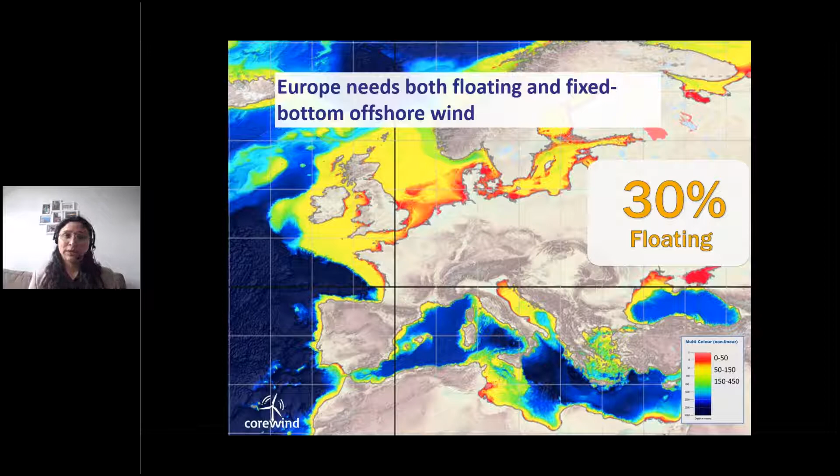Now, in the next slide I show you how we have a pipeline worth of projects of at least 7 gigawatts that we are sure the industry can deliver at a cost of 40 to 60 euro per megawatt hour. But this is only going to happen if we have the right policy framework that will remove the barriers to mass deployment. And also to mention, this 7 gigawatt pipeline is mostly led by 3 countries, Norway, France, and the UK, but there are others, of course, from Southern Europe also chipping in.

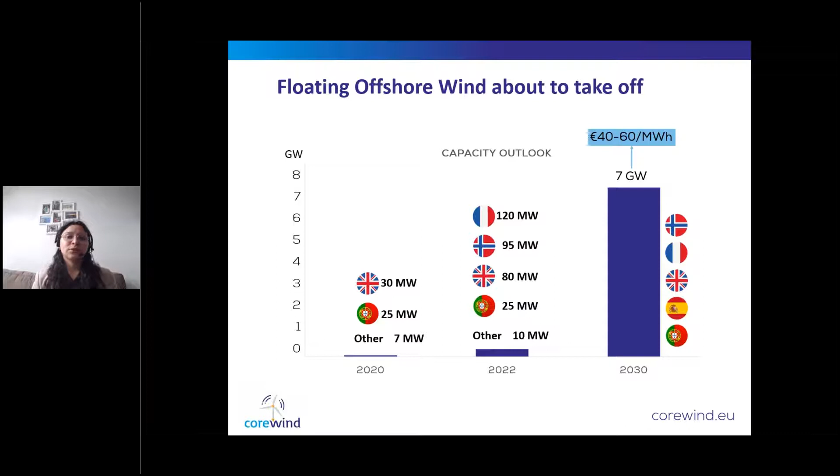Now, what is it that we need then to move forward in terms of the regulatory barriers? Well, I will show you in the next slide what is the right framework for delivering floating offshore wind farms. We want to have enough visibility for the supply chain to be ready to deliver these large projects. This requires a clear auction timetable, which means we want technology-specific auctions because the technology still needs one more step towards cost reduction.

This is also possible to achieve with a model using contracts for difference. This is currently the best model to provide stable revenues. Actually, banks today are willing to lend up to 80% of all the upfront costs when using CFDs. Also, we want a one-stop shop for permitting. This is going to make all of our permitting process much faster and with a single authority, and much more transparent.

We need to ensure there is enough development for the grids. This requires both private and public investors. And of course, we're going through all this while ensuring a happy coexistence with other sea users, so not only dedicated to offshore wind. So, to conclude, I want to show you in the next slide how we are delivering this.

So we are delivering floating wind farms in the future, which requires us to link currently our innovations, which is the research and innovation sector, with the applications, which is the supply chain and industry applications. And the way to do so is through the right policies. So together, this is how we can deliver and scale up floating wind to deliver renewable and affordable electricity to all Europeans. Thank you very much.

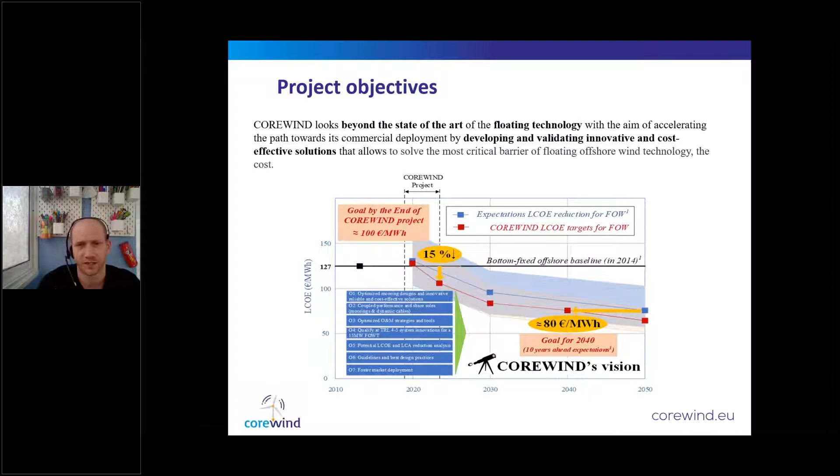If we move on, one of the key objectives is how we are approaching this. What are the key challenges on floating, as also related to Lisa's previous presentation? We have key challenges on cost, reliability, industrialization, and so on. To address this, we are trying to cope with different technologies and innovation procedures.

We will work on digitalization, which is really important to increase or maintain reliability and operational maintenance. We will work on high multi-fidelity advanced models, because we really need those advanced models to cope with the whole design and construction phase. And we are working on optimization of mooring, dynamic cables, and so on.

Something that is sometimes not that considered within EU research projects is the importance of industrialization and standardization. This is something we are strongly considering within Corewind, because what we want is to really make it happen that our innovations will reach the market at some point and will help. Of course, industrialization will come later on, probably in a few years.

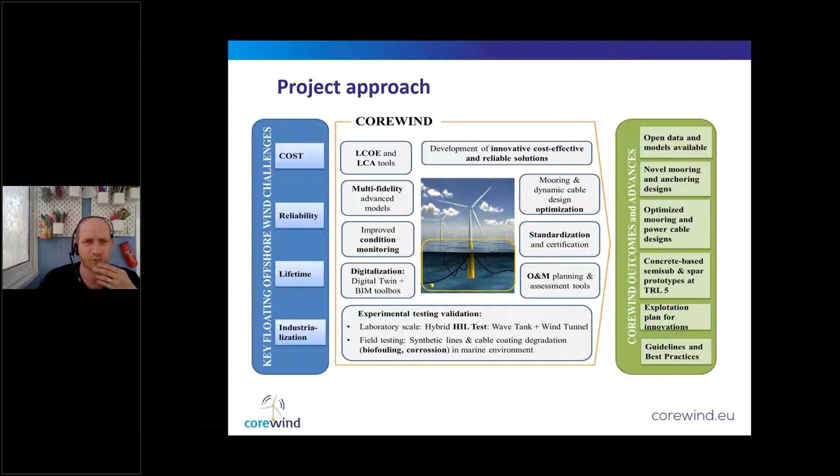But what we will provide, at least by the end of the project, will be some open data, open models, new designs, and of course some knowledge and guidelines, to ensure that forthcoming innovations become true. Then, let's detail a bit what the expected impacts are.

Of course the key objective within floating wind is just to reduce cost. We want to go beyond a reduction of the LCOE of 15%. Of course, this can be done with different approaches and different innovations, and what we will do is take advantage of most of them and put them together.

So we will go from upscaling - of course we are already working with 15 megawatt wind turbines - we will work on shared moorings, optimized and integrated designs for dynamic cables, and improved operational maintenance strategies, including digital twins and so on. And finally, also include wind farm lifetime.

We want to extend it up to at least 30 years through the appropriate digitalization techniques. And in that part, we will provide some nice tools and key reference documents to help the value chain.

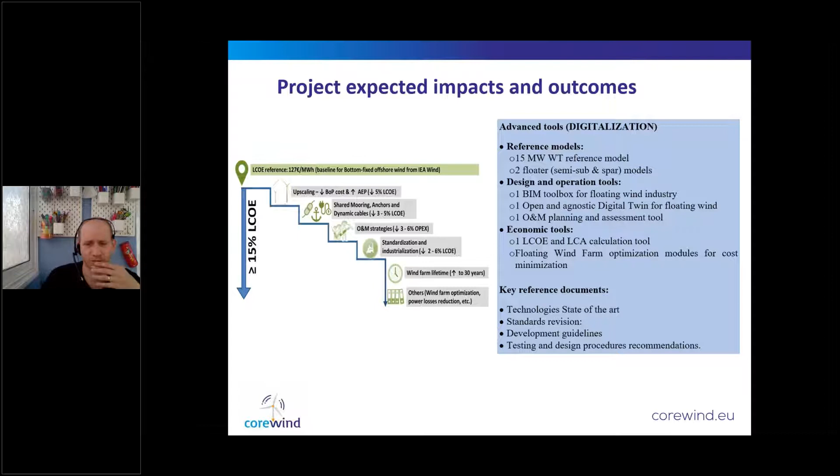If we move to the next slide, we will see where we are now, and somehow it will introduce the coming presentations that we will see. As Sabina said, the Corewind project is now at month 18, so of course we are expecting to provide much more outcomes and more detailed results.

But up to now, what we can offer and already present are our reference models. You probably all know the 15 megawatt reference from NREL, and we also have two floater models already available, so you can try to use them if you want. We also have some economic tools that will be available soon, like an LCOE calculation tool. And finally, we already have some public reports and deliverables.

More details on these resources and outcomes are on the next slide. You can see here that you can go to our web page, as Sabina already told you - on corewind.eu publications, you will find all of these reports.

So we have quite a bunch of them, and I think they are quite interesting and useful. And if you visit our Zenodo community, you will find out there not only the reports that are available in both sites, but also the models. So you can download it for OpenFAST and use the WindCrete and the ActiveFloat models for the analysis.

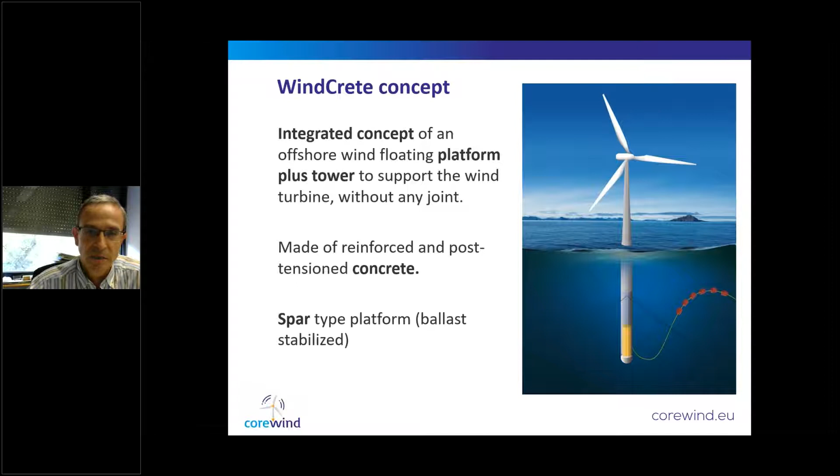In the next slide, we can see one of the characteristics of looking for low cost or cheaper and reducing the LCOE and so on. We can take advantage of using some materials, like for the ballast. In this concept, we propose the use of black slag from electrical furnace. This is a byproduct, and it is possible to achieve easily a bulk specific weight of 25 kilonewtons per cubic meter, which is not as much as we can obtain with other materials, like magnetite. However, it has the advantage that it is significantly cheaper, as the estimated cost already placed would be around 35 euros per ton.

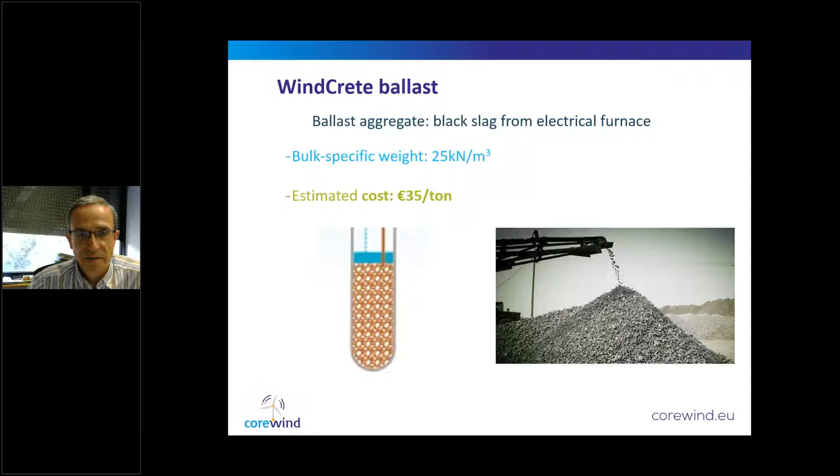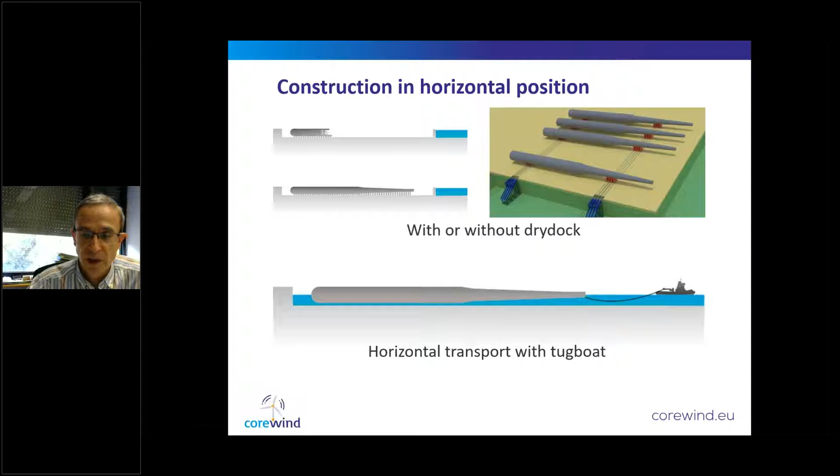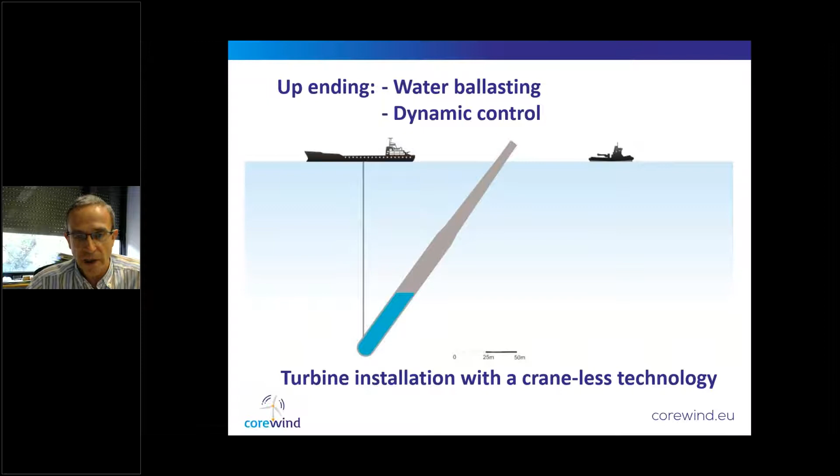Following that, for the installation, in the next slide, we can also see the upending operation. That is also one of the challenging operations during doing this in the open sea. Of course, we use water ballasting and a dynamic control, because this process has to be very smooth, and in fact there is a huge amount of tonnes moving, so this has to be carefully done, but in a smooth way with dynamic control. And finally, for the installation of the turbine, we are working with a craneless technology.

To summarize the concept, before going ahead with more details of the model that you can find in Zenodo, let me summarize some of the particular advantages or properties of the WindCrete concept. First, that this is monolithic without any joint, and this is interesting in any case because it produces more durable constructions and platforms. The draft, of course, in a spar buoy is large, so normally we estimate that the minimum draft we can work with is around 80 meters, and the maximum draft that we thought would be reasonable from the economical point of view is around 160 meters. That is, for example, for the 15 megawatt wind turbine. This can be a limit.

The operational depths, consistently with the previous draft, go from 100 meters to 1,000 meters, despite, of course, the mooring system being significantly more expensive. And what is very important is that the design is adaptive, and as you will see, we can also produce a design for a 15 megawatt wind turbine.

At the end, the advantage of using a structure which is more durable and with concrete is that we can assure, for example, a lifespan larger than 50 years. And this is also very important because it reduces everything. And also the use of concrete with larger structures produces a reduction of the CAPEX. And if you have a more durable one with almost no maintenance in the platform itself, this also reduces the OPEX. And at the end, all this produces a significant reduction of the LCOE.

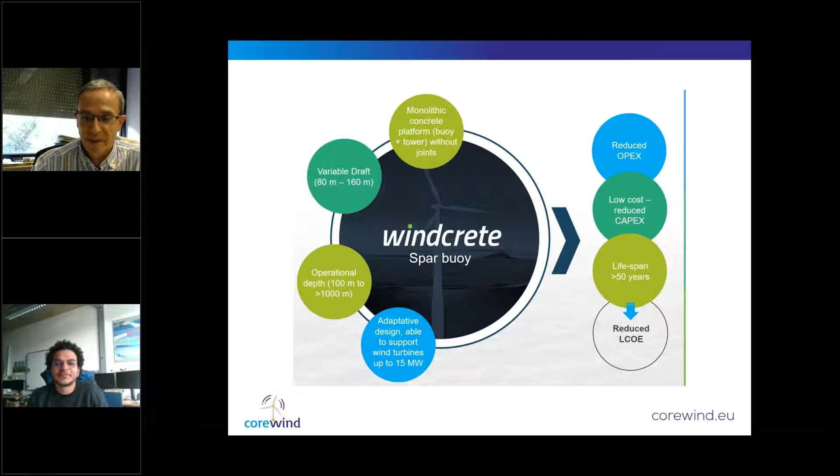Now, my colleague, Yusuf Mahfoud, will present the details for the Gran Canaria prototype. We can't hear you, Yusuf. I think you need to unmute yourself.

Sorry. Thanks, Clement. In the next few slides we will go through the WindCrete design for the Gran Canaria site, which has a depth of 200 meters. The draft of the WindCrete spar buoy in this site will be 155 meters, with a hub height of 135 meters. As you can see in the figure, the tower base diameter is 13.2 meters and the tower top is 6.5 meters. And the buoy structure is made out of mainly 3 parts.

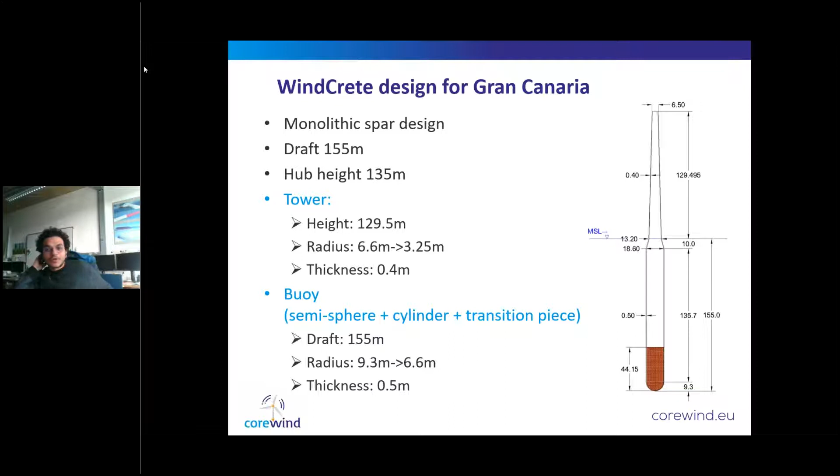At the top, 10 meters of a transition piece, which is a conical shape, and then we have a cylinder to give the buoyancy forces to carry the RNA, the rotor nacelle assembly, and the tower. And at the bottom, we have a semi-sphere shape to decrease the pressure at the bottom of the spar floater. In the next slide, we can see the composition of the FAST model.

So we use the 15 megawatt IEA wind RNA without any changes: the blades, the nacelle, and the generator. And we couple it with the WindCrete floater, which includes the tower, as Clement mentioned. And we have a mooring system, which is a catenary symmetric delta-shaped mooring line system to provide stiffness in the yaw direction as well as the sway and surge directions.

For the controller, we tuned the ROSCO controller, which is the NREL reference open source controller, for floating wind turbines to prevent any negative damping in the pitch direction. In the next slide, we see natural frequency results from a free decay test done for the OpenFAST model. On the left image is the surge decay, and on the right the pitch decay, with the frequencies in hertz and seconds in the table below for surge, heave, pitch, and yaw.

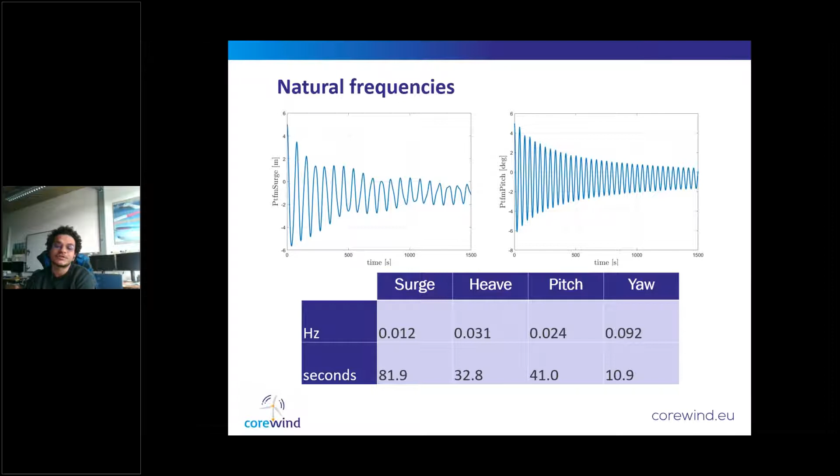For the platform, the surge natural period is around 82 seconds, the heave period is around 33 seconds, while the pitch is around 40 seconds, and the yaw period is 11 seconds.

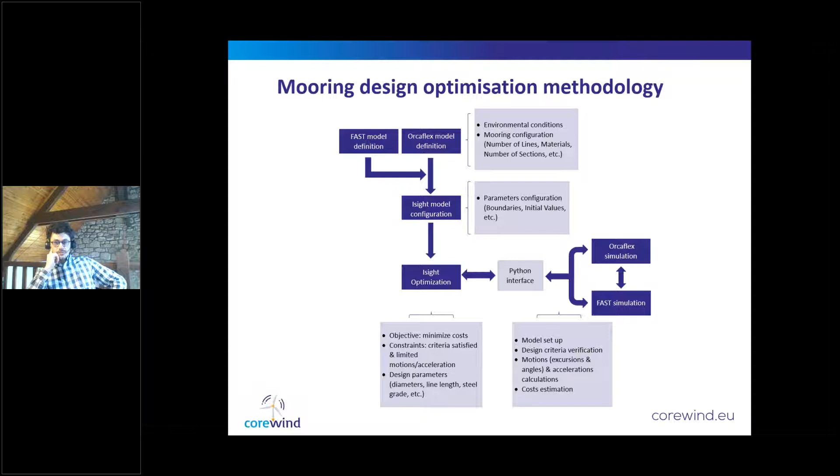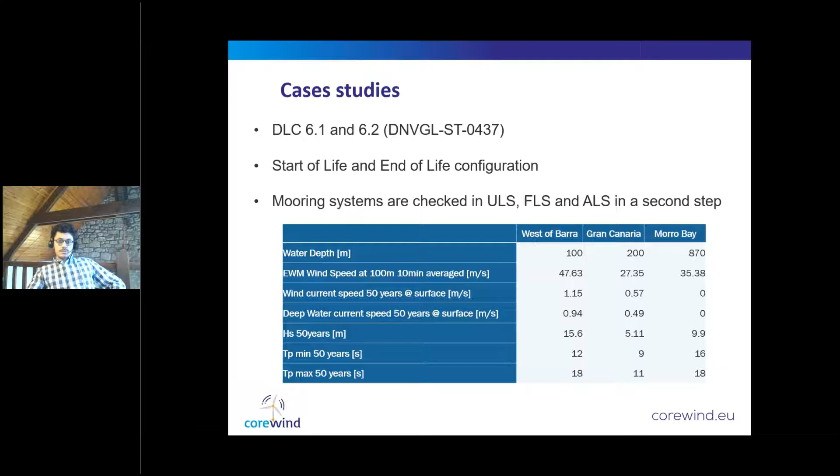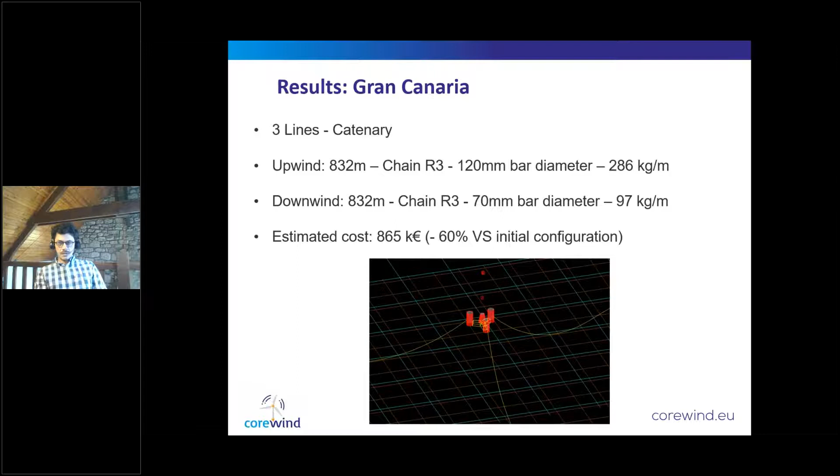On the next slide, we are presenting the results for West of Barra. As I said before, this site is a lot more complicated, so the mooring system is a lot more complicated. This mooring system is also a catenary mooring system, composed of 12 lines. You have 6 catenary lines upwind and 3 lines on each side downwind. And the lines are composed of nylon, chain, and clump weights.

The nylon is here to add some elasticity in the axial stiffness of the line to damp the peak loads a bit. And then we are using some chain and clump weights to create some weight in the mooring system, to create what we call the mooring restoring force.

So what you can see is that the lines are really long. We have more than 1 kilometer of line length, and our estimated cost is really high also, almost 15,000 kilo euros for this mooring system. And we have no comparison with the initial one because the initial mooring system wasn't working.

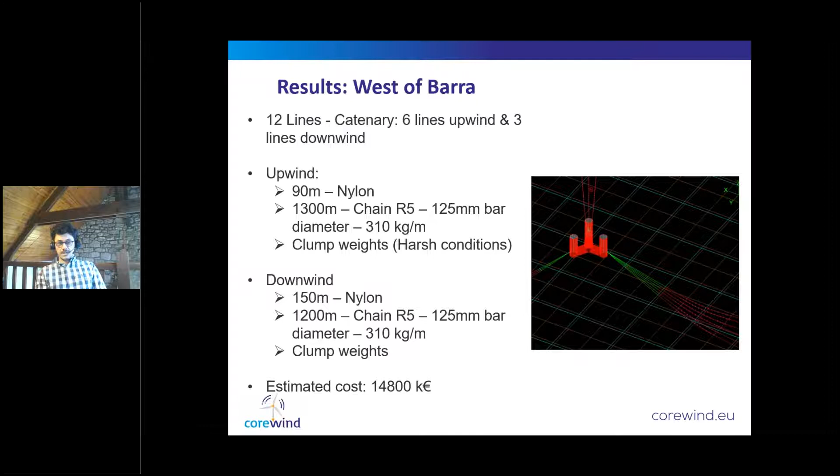On the next slide, we are presenting the mooring system for the Morro Bay site, which is a deep water site. So it's a semi-taut mooring system with polyester line, which offers a really high axial stiffness, with 50 meters of chain on top, and on the bottom between 130 and 140 meters of chain.

This mooring system was also optimized, and we can see that we managed to reduce the price by 55% compared to the initial mooring system.

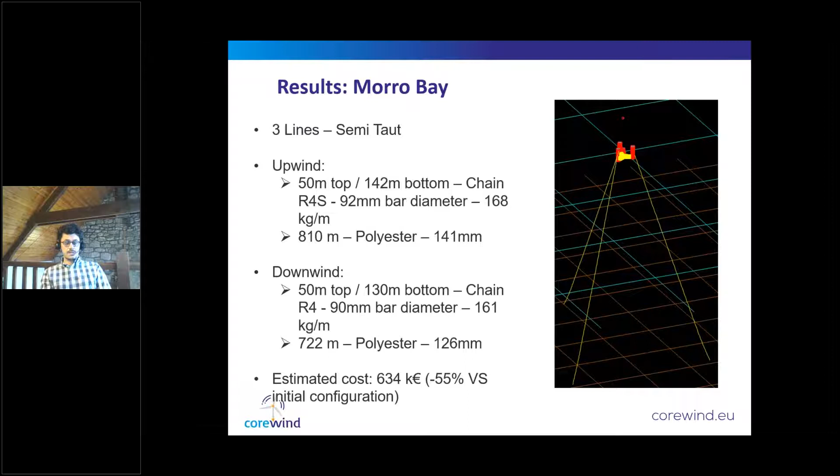On the next slide, we are summarizing the comparison between the price of the mooring system. So as I was saying, in Gran Canaria, we started with a price between 2,000 and 3,000 kilo euros, depending on the chain grade. And we managed to optimize the mooring system to reduce the cost down to 900 kilo euros. For West of Barra, we don't have any comparison because the initial mooring system was not fulfilling the design criteria.

And for Morro Bay, the last mooring system, we reduced the price from 1,400 down to 600 kilo euros. So this was the mooring system that we optimized for the first year, which are quite basic mooring systems. And now we are starting some new tasks to look at some more complex and optimized mooring systems.

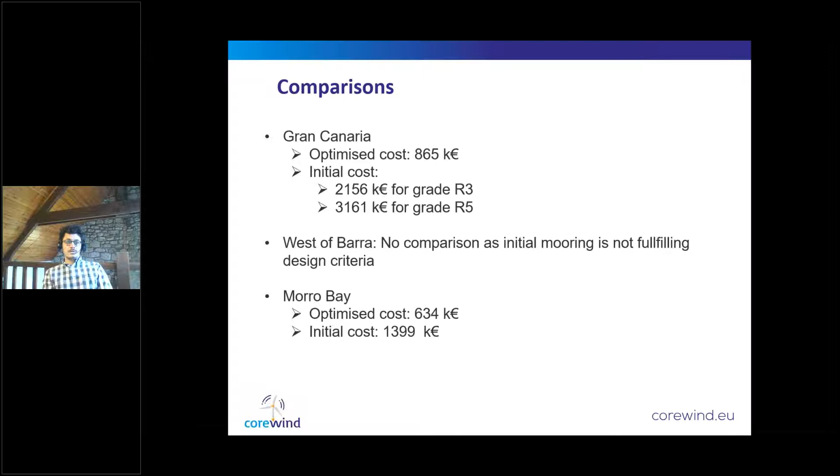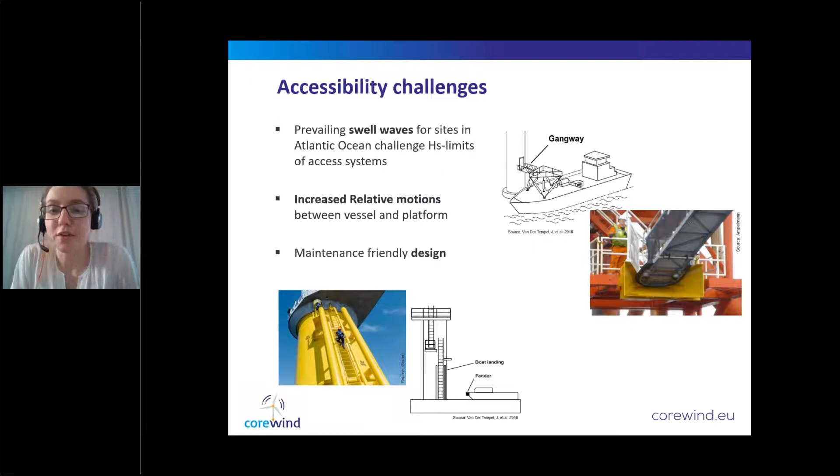Regarding the topic of large component exchange, here we face the challenge that in general floating wind farms are installed on sites with, of course, large water depth, and here it's not possible anymore to use jack-up vessels. So we need to find new strategies for the large component exchanges. And the first one is the tow-in solution, which mainly depends on the distance to the harbor, and of course also on the harbor capacities.

It also depends on how easy it is to disconnect and reconnect the mooring lines and the cables of the substructure, and of course also on the substructure type, how easy it is to tow it back. Then the second solution is to use a floating crane vessel. We call this floating to floating operation.

Here the relative motions of course play a major role, and the solution that has been developed is a two-lift operation. That means that the relative motions are reduced by performing the lift of the wind turbine or of the component on the same reference level as the crane, and then in a later lift do a bigger lift back to the wind turbine. So this is a nice solution, which reduces the relative motion significantly.

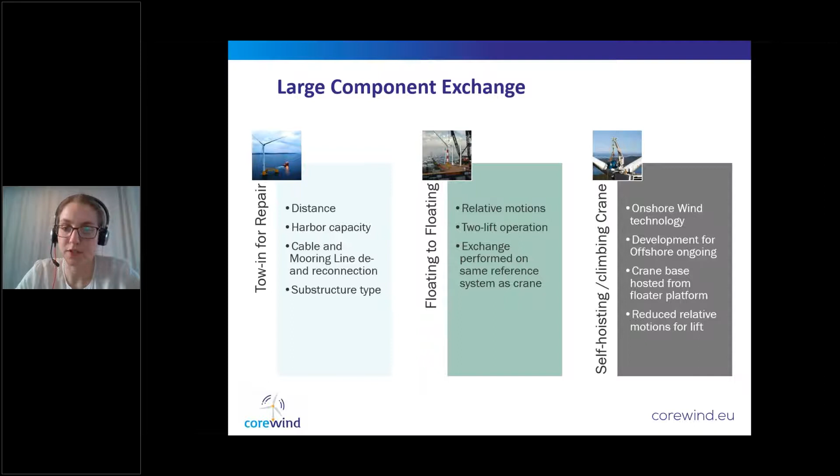So moving on to the next slide, and here picking out the topic of the mooring lines. I want to share some experiences from oil and gas. So these experiences showed that the damages occur mostly through external threats, like fishing nets, boats, seabed contact of the mooring line, or a collision, for example, of a remotely operating vehicle with the mooring line. So damages from external threats are, of course, more difficult to extrapolate to a wind turbine cluster, as it can be done for fatigue damages, for example.

This is... they are hard to see in advance when they will happen. So this extrapolation here is, of course, not so easy to do.

And further, there's a second challenge. So when we have a tow-in situation, we will need to park the mooring lines on the site and do this wet storage, as it is called, of the mooring line on the site. So here there is, of course, the risk that the mooring line will get into more contact with the seabed, and that this will cause abrasion on the mooring line if it is the case that we have a fiber

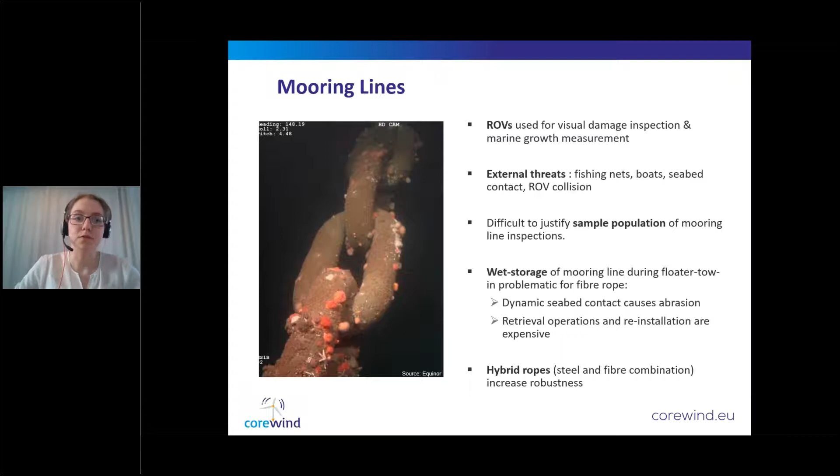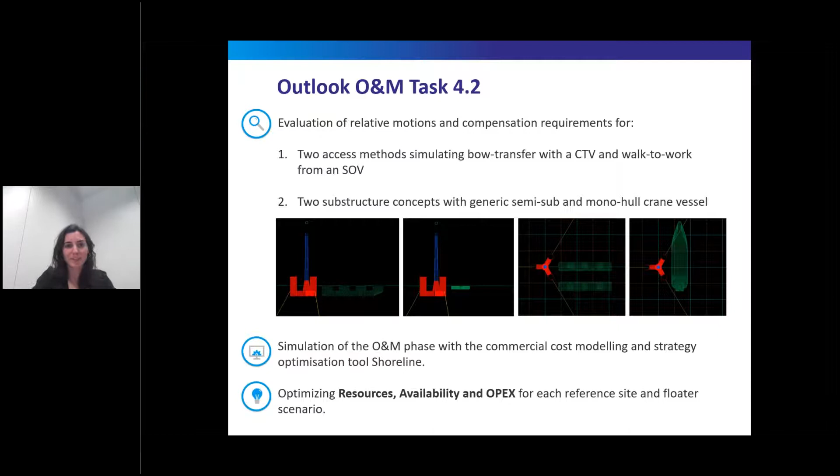That was very clear. So now moving on to Jose Ignacio Rafa from IREC. So I gather you'll be telling us a little bit about the FowApp, which is an intuitive application which we've developed in the Corewind project, to be used during early project planning of floating offshore wind farms. So tell us more, Jose.

Hello, thank you, Sabina. So let's begin with the first thing, and that's answering what's FowApp. In short, FowApp is a desktop application to assess floating offshore wind farms from two perspectives, environmental and economic. It allows the calculation of the annual energy production based on the wind farm configuration and the wind climate as the delivered energy to the onshore electrical grid.

Also, an analysis of the life cycle costs can be done using this tool, understood as all the expenses incurred in the wind farm from its development until its decommissioning. Based on these calculations, the application determines the levelized cost of energy, which is a common metric to compare different technologies.

And last but not least, it's also useful to perform the life cycle assessment of the wind farms, which is the environmental evaluation of the technology that considers the materials used, the transportation processes, and the end of life of the farm, among others. The LCA is also referenced to a functional unit to allow its comparison to other technologies, which is in this case the electrical energy delivered.

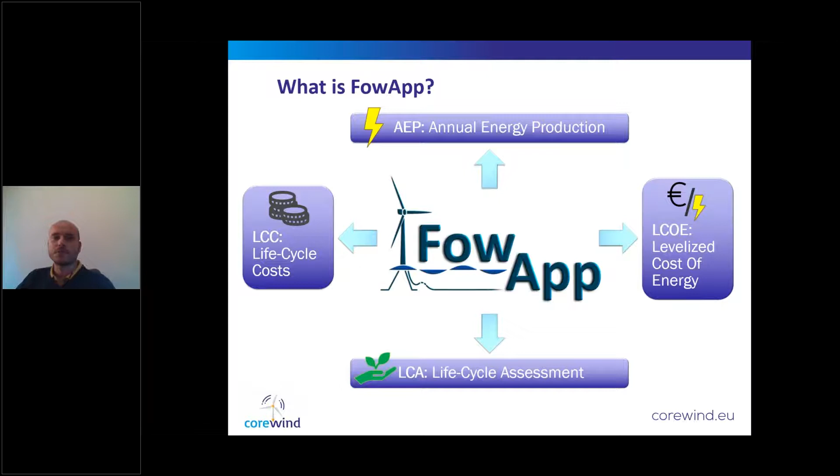But before continuing, in the next slide, we'll step back for a moment and see why FowApp has been developed. Well, offshore floating wind farms introduce new technologies such as dynamic cables and floating substructures. Moreover, new strategies must be defined for the design, installation, and O&M, among others, as exposed by the previous presenters. Additionally, overall costs must be reduced before we see a massive deployment of the technology.

So if we consider these aspects, we see that it is a complex technology with many disciplines involved and lots of challenges. On the other hand, existing applications lack technical detail, are not focused on floating wind, and only pay attention to the financial details, defining a gap that can be understood as an opportunity.

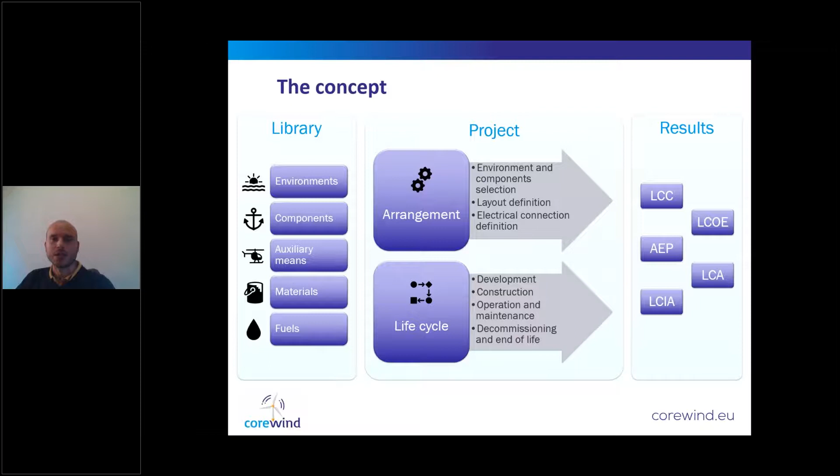In the next slide, we will focus on these results. The annual energy production is calculated only using the arrangement information, including the intermediate results. The subsystem efficiencies are provided with additional details for the wakes, and the capacity factor is also calculated.

Regarding the life cycle costs, a detailed analysis is performed to assess the different phases of the project. The levelized cost of energy summarizes the wind farm performance, and also calculated is the effect that each phase has on it. Finally, the life cycle assessment provides the impact on 7 different categories.

This module is not yet finished, but when we finish it we will consider the effect of the materials used for the different components, as well as their origin, the impact of the fuel consumed by the auxiliary means, and also the effect of the end-of-life management, with multiple options to be selected by the user.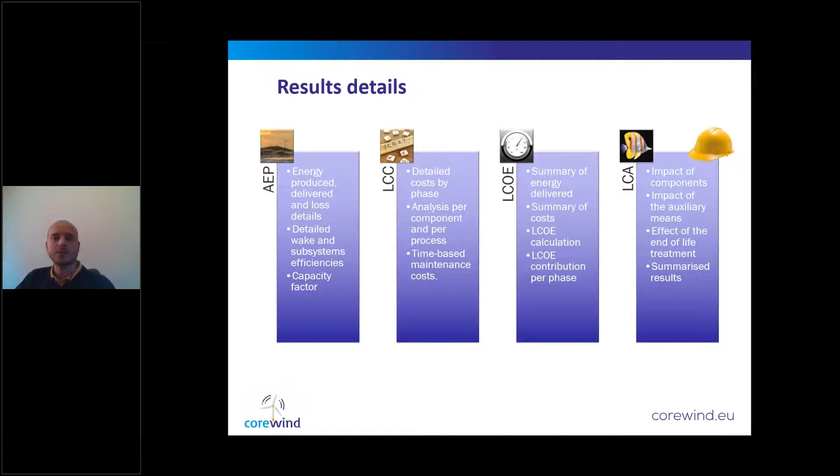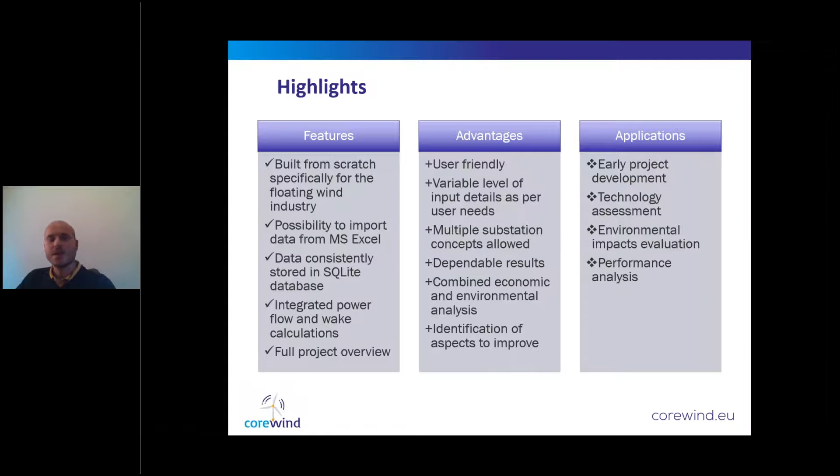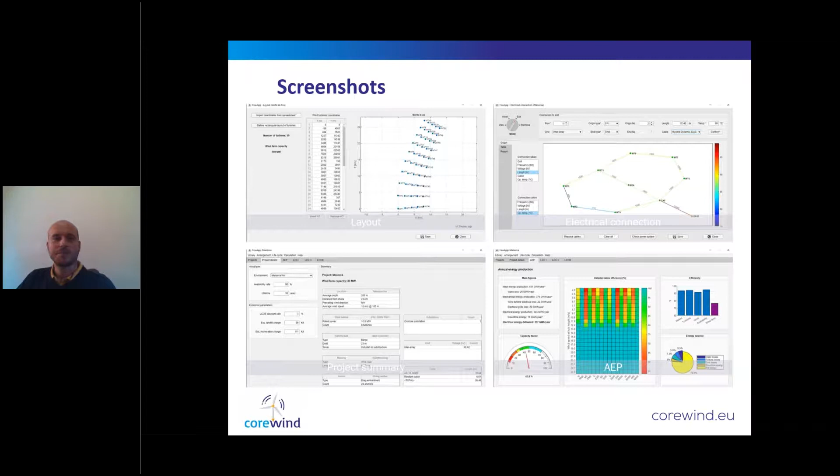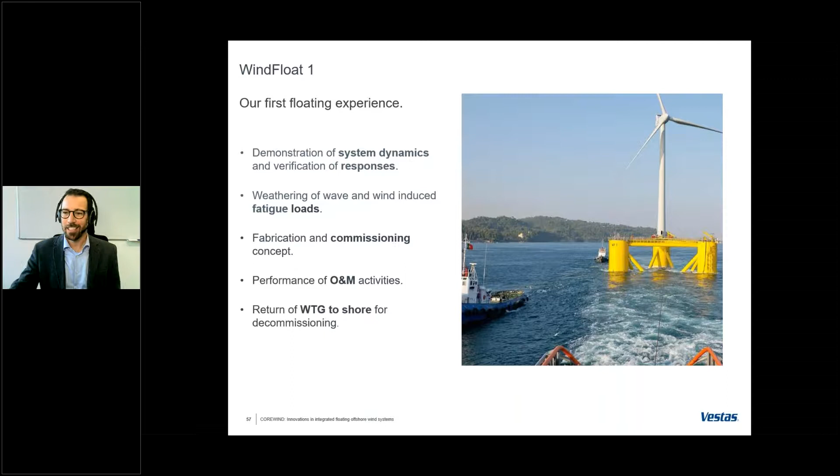The cool thing about that is that, upon realizing no significant degradation was suffered by the turbine, it gave us the confidence to go for bigger, better, and braver projects. Let's go to the next slide.

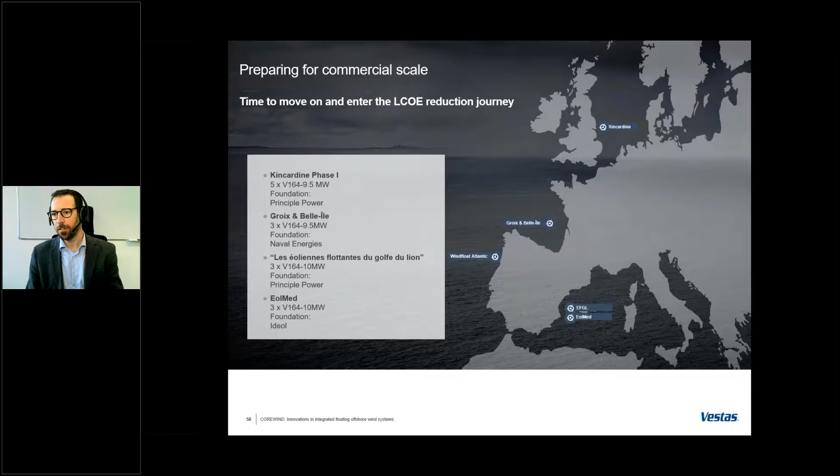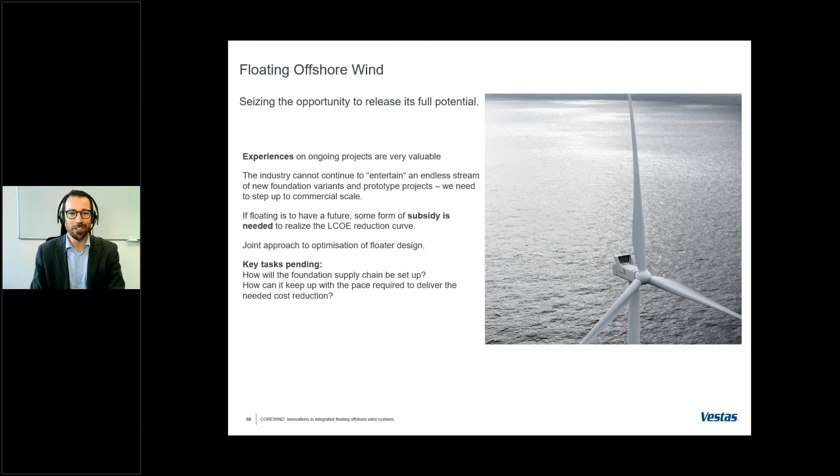And they address all the innovations from across the supply chain, and it allows the industry to then quantify the collective impact of cost outs and its overall impact on the LCOE. So, yeah, I think I'm out of time, but I thank you very much for the opportunity today to present our view. Thank you very much.

Thank you very much, Pablo. And good to hear your perspective on what is needed to release the full potential of floating, and also that what we're doing in the Corewind project is somehow useful to that. So indeed, we can now go on to the questions. We actually have quite a few.

Starting with a question for Lisette. Lisette, can you elaborate on how the pipeline of floating projects will deliver the projected cost reduction, which we're always speaking about?

Thank you very much for the question. And yes, of course, I was mentioning the pipeline is worth at least 7 gigawatts. This is because, to connect it also with the cost projection reduction, the first pre-commercial projects or demonstrators of arrays were at a cost of slightly over 200 euro per megawatt hour. This is of course higher than bottom fixed, and we know that because floating is developing now.

However, if we take a look now at France, France has one of the most ambitious plans to deliver floating wind farms. And actually this year is the first commercial auction for 250 megawatts at a cost of 120 euro per megawatt hour. And we estimate that this site that will be auctioned this year, and there are 2 more coming next year, will be installed in around 6 to 7 years from the moment they are auctioned. So that is already connecting the dots.